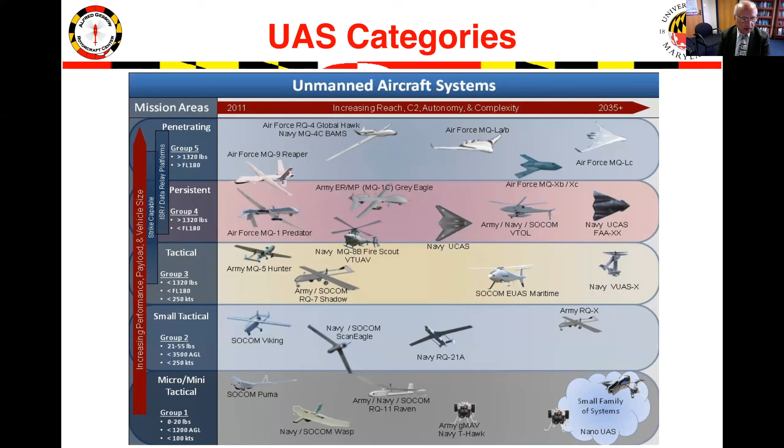Okay. So my talk is going to be small UAS and delivery drones, challenges and opportunities. So I'm from the University of Maryland, and I've been working in this area for the last 20 years or so. So let me first start with the definition of what I'm going to talk about, small UAS. As you know, the Department of Defense has divided these unmanned aircraft systems into 5 groups. I'm going to talk about group 1, which is at the bottom, called micro mini tactical aircraft. The differential is that the gross weight is less than 20 pounds. Some of the vehicles you see on the bottom fall under this category. Okay.

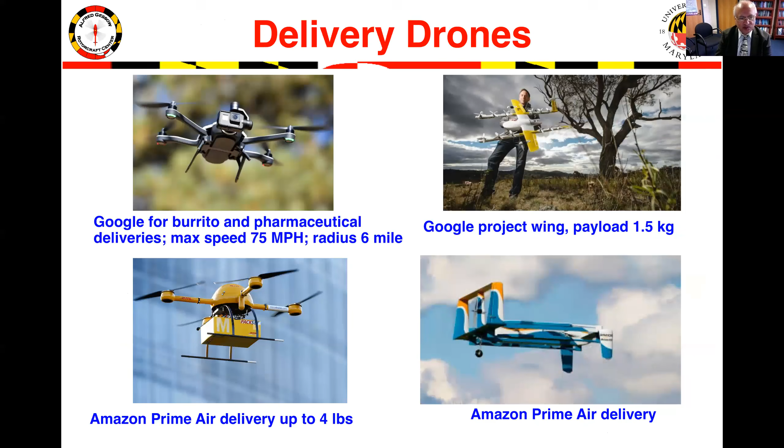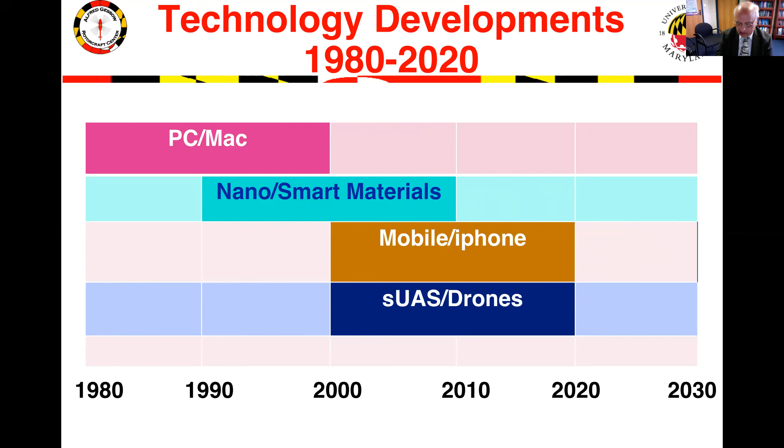Okay. So let me talk about the technology development cycle of 20 years. In 1980, it started with the PC and Macs. Then 1990, nano and smart materials. In 2000 was the beginning of the mobile phone or iPhone. And at the same time was small UAS. And so I think hopefully by 2020, the technology will be in a more mature state. Okay. So what are the key drivers of microelectronics? You see miniaturized sensors, servos, and autopilots available. Microprocessing, both the IT and transmission power growing. And this is very closely tied to mobile technology. Advances in microfabrication and 3D printing, numerous potential defense and civil applications, and low-cost systems.

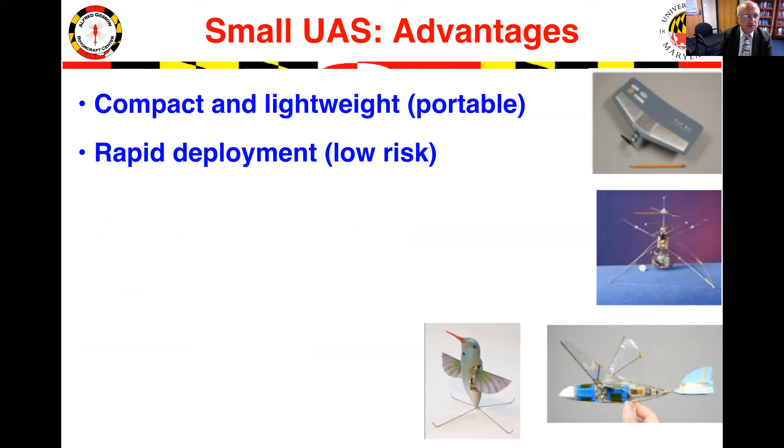Advantages, as you can see, are compact and lightweight, rapid deployment, real-time data acquisition, low radar cross-section, which is especially very important from a military point of view, high maneuverability, and a low-cost system. While you see these advantages, there are also disadvantages one has to keep in mind.

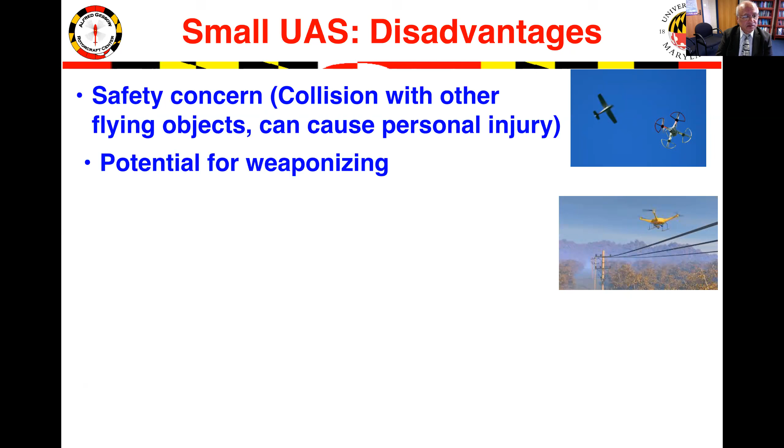Safety concerns, say collision with other flying objects, or they can even cause personal injury to people. Potential for weaponizing, which can be both positive as well as negative. Security threats, privacy issues, susceptibility to damage, especially if you are flying in a gusty or constrained environment, and the need for countermeasures against multiple swarms or collaborative groups.

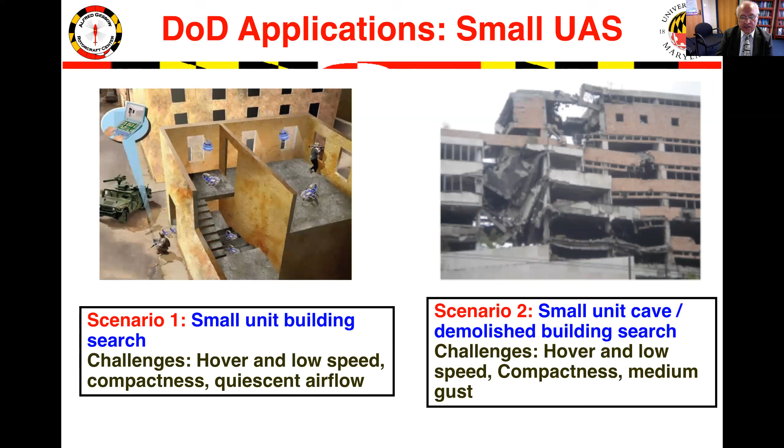Okay. We'll talk now about potential applications of these small unmanned aerial systems. From the DoD point of view, small unit building search, small unit cave or demolished building search. All these things started almost 15 years ago at the start of the Afghanistan war. Autonomous small unit perimeter defense, and over-the-hill, around-the-corner reconnaissance missions. Each one brings its own challenges that one has to take into account.

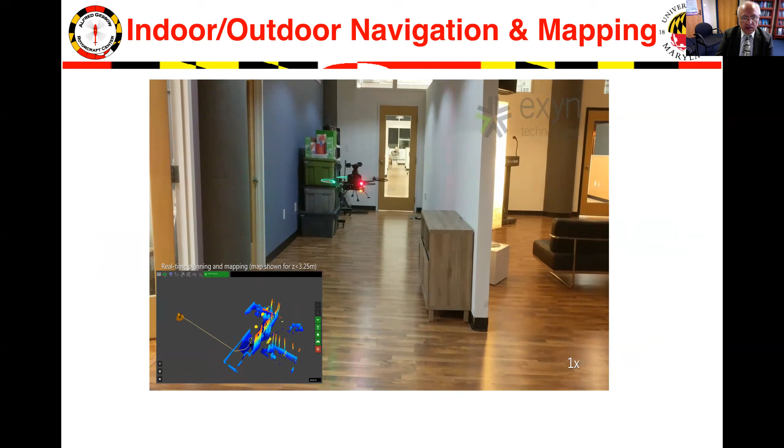Another is operation in 3D, which is dull, dangerous, dirty environments. And you can see indoor and outdoor navigation and mapping. Civil applications are numerous: drug delivery in remote places is already going on in some African and Asian countries. Videography and photography, especially at parties.

Fire rescue operations, a new one getting more and more widely used now. Traffic monitoring. Agriculture applications, which are growing very rapidly: crop spraying, crop estimation, agriculture mapping, crop health monitoring.

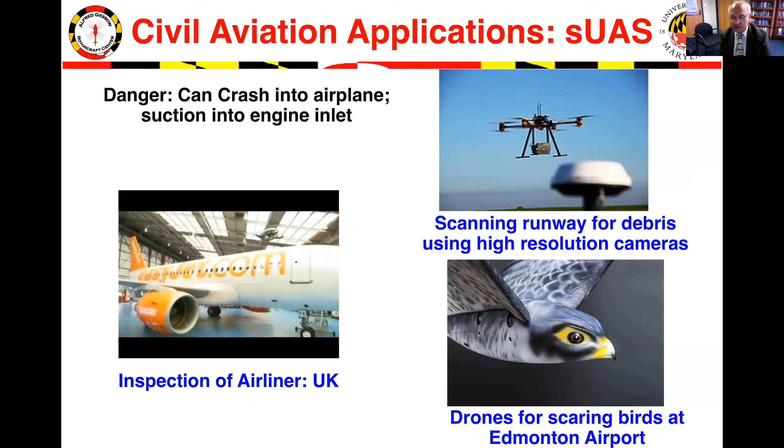In civil aviation, initially, of course, there is the danger they can crash into an airplane, so civil aviation people didn't like them initially, but now they're also using them: inspection of airliners is being done in the UK, scanning a runway for debris using high-resolution cameras, and at the bottom, drones for scaring birds at Edmonton Airport, which is in Canada.

And here is what you see: the big bird is actually a drone and produces all sorts of noise to scare birds. This is called a sonic bird repeller. Other civil applications: infrastructure inspection of bridges, wind turbines, high-voltage cables, gas pipelines, parking lots and roads. A wind turbine, for example, can take almost half a day, especially offshore, which can be done in less than an hour.

Detection of hazardous agents, and also at the bottom, security tagging and targeting, which was also done in Afghanistan. Border law enforcement, counter-drug operations, hostage rescue operations. Another one, asset mapping, is being done. This is hurricane relief surveillance, done by the Red Cross in the Houston area last year. So you heard a wide range of applications.

Let me describe the capability of a small UAS platform: mobility, intelligence, and multiplicity. For example, for mobility, the smaller the better. But for gust sensitivity, smaller is terrible. Frequency of operation is much higher in a small one, so one has to keep that in mind when choosing a sensor.

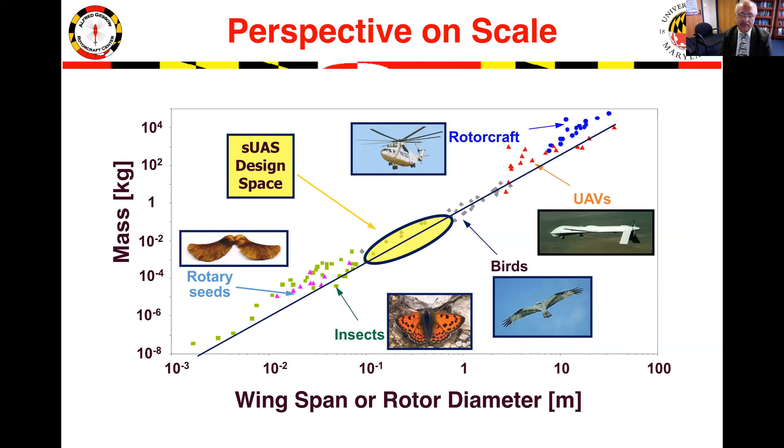Now here is, of course, a perspective of scale. The vertical axis is mass, the horizontal axis is the wingspan or rotor diameter. As you can see, the bluish ones are full-scale rotorcraft, the red ones are UAVs, black are birds, green are insects, and magenta are rotary seeds. So all these things actually fall on a trend line. Small UAS fall somewhere between large insects and small birds.

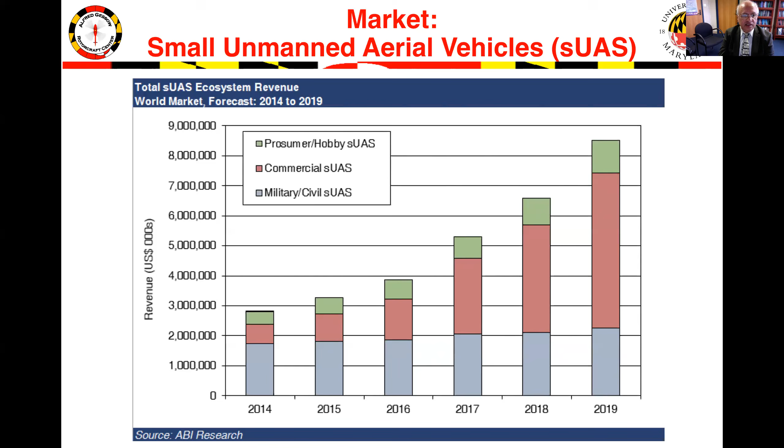Okay. How big is the volume? This year, 13 million of these platforms have been sold, platforms which are less than a kilogram. As you can see, the bottom grayish one is defense, which is more or less saturated, not much change. And the top one is hobbyist, which is again saturated. So the real change is happening in civil, commercial applications, which is the light pink.

In terms of dollar value, it is currently about 15 billion and expected to be 25 billion by 2020. This does not cover delivery drones, which may almost triple this market. Just to give you a feel about delivery drones, a few years ago we had an AHS student design competition. Our students participated. This was to have a delivery drone in the area of the Washington and Baltimore suburbs.

It requires 2-hour delivery, almost 5,000 packages per day, in something like a 50 miles by 50 miles area. At peak time you need about 443 packages, which means 300 vehicles in the air at a time. So you need, of course, a central warehouse, the customers, drones, and communication.

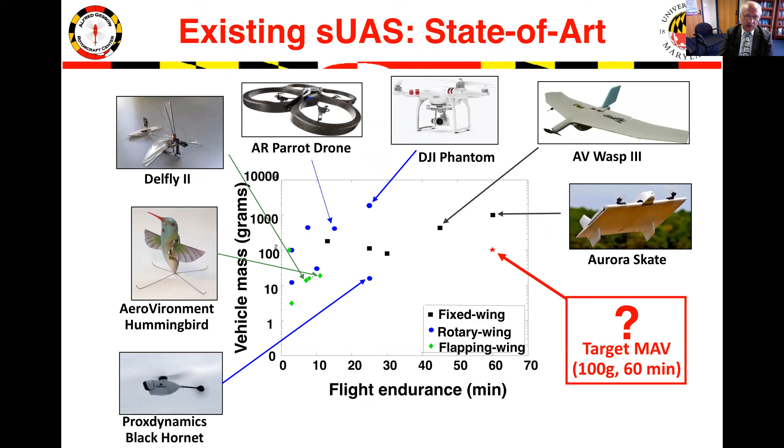And this is how it will go. So you can see almost 300 vehicles can be there at a peak time. So again, I said DARPA came up with the idea of 100 grams, 60 minutes. Where do we stand today? The fixed wing can achieve that goal, but the rotary wing is still struggling at close to about 20 minutes. They do not have the needed endurance or the payload. So I will talk about some of these vehicles later.

So what is the required capability? Of course, you need flight, hover, forward flight, gust tolerance, and autonomy. I think you need feedback control that is fast, computationally simple, and robust. If you think about a quadrotor, you need a rotor, which means it is exposed to very low Reynolds number aerodynamics, plus the propulsion system, motors, speed controllers, sensors, navigation, airframe, and the payload. So let me go through some of these elements one by one before coming to a complete system.

So low Reynolds number aerodynamics. Reynolds number is the ratio of inertial force to viscous force. In a full-scale helicopter, the Reynolds number can be a million or more, whereas at small scale it can be 10,000 to 100,000. This is the range where the flow goes from laminar, through transition, to turbulent. In laminar flow, where most of these vehicles operate, viscous forces dominate, and the flow is more vulnerable to separation under an adverse pressure gradient, which means CL max, CD minimum, and CL over CD are functions of Reynolds number, and they get affected.

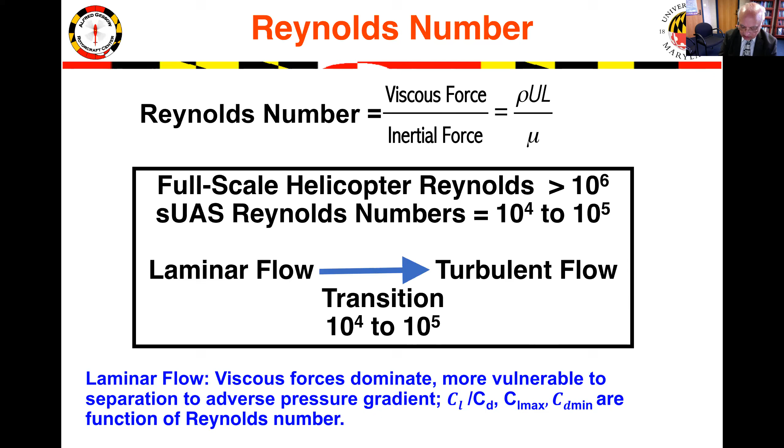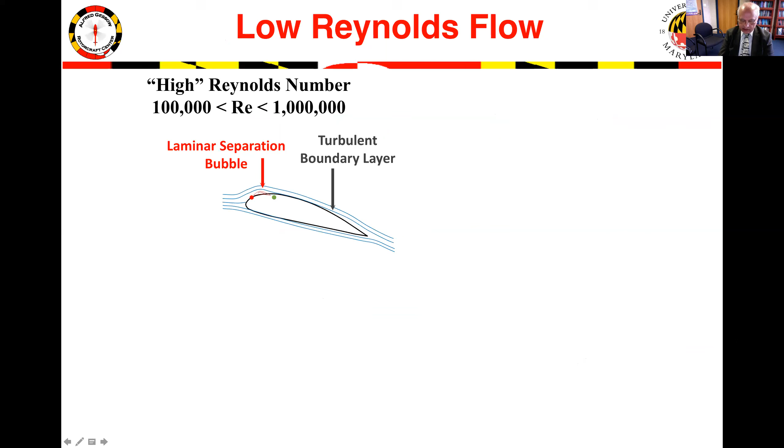First we start with very high Reynolds number. As you can see, there is a laminar separation bubble near the leading edge, which gets reattached. As you lower the Reynolds number, this separation region spreads. But when you go to very low Reynolds number, like 10,000 or around that, there is separation right near the trailing edge, and that separation region spreads with increasing angle of attack. So low Reynolds number flows are prone to complete separation on the top surface.

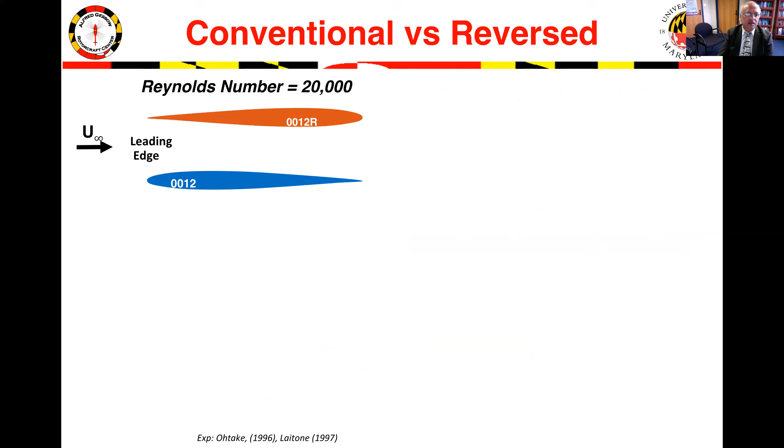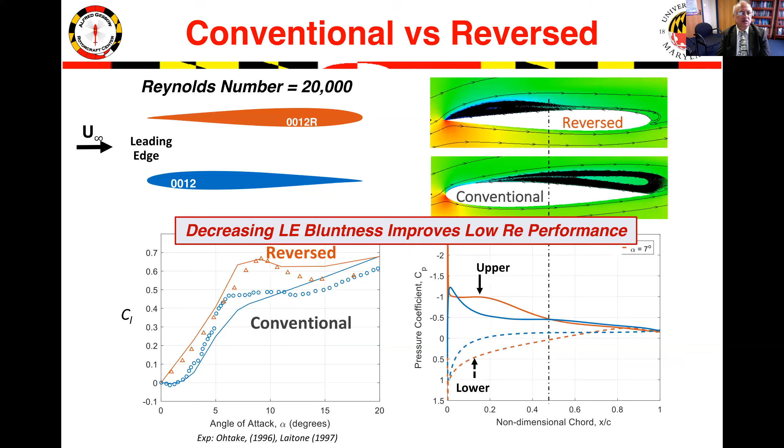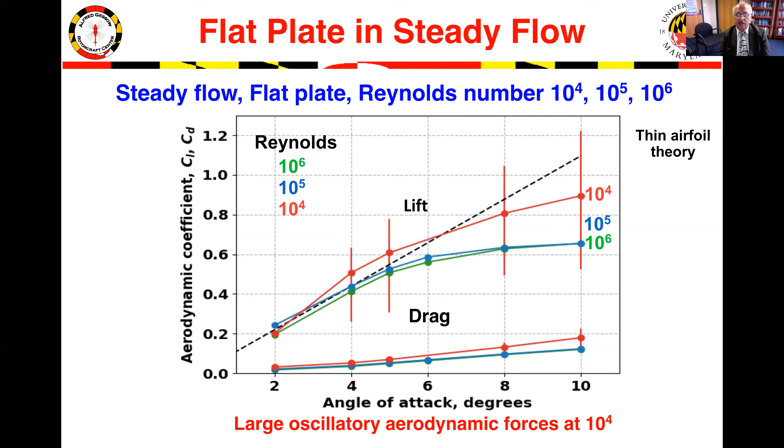Another one: I take steady flow over a flat plate at Reynolds numbers of 10,000, 100,000, and a million. At 10,000, there is a lot of oscillatory flow, which is not the case at a high Reynolds number.

As you can see, the flow at the very first 10,000, 10 raised to power 4, there are a lot of vortices being shed. If you take an oscillatory flow at a low Reynolds number, defined by reduced frequency K: 0.005 is quasi-steady, 0.05 is unsteady, and 0.5 is highly unsteady. And as you can see, as the reduced frequency decreases, there is increased presence of high frequency content.

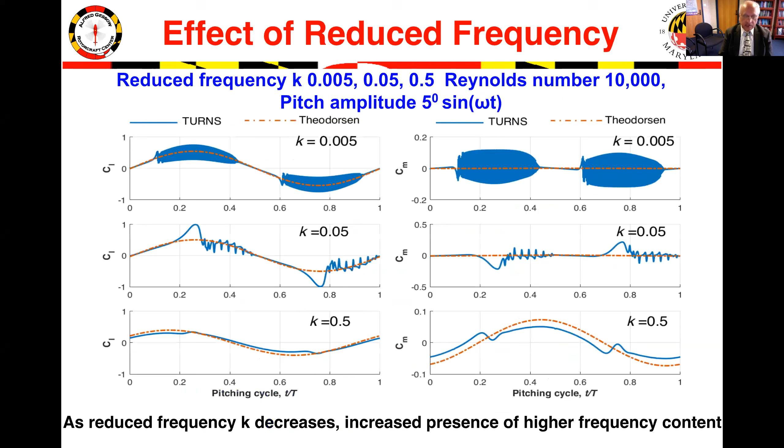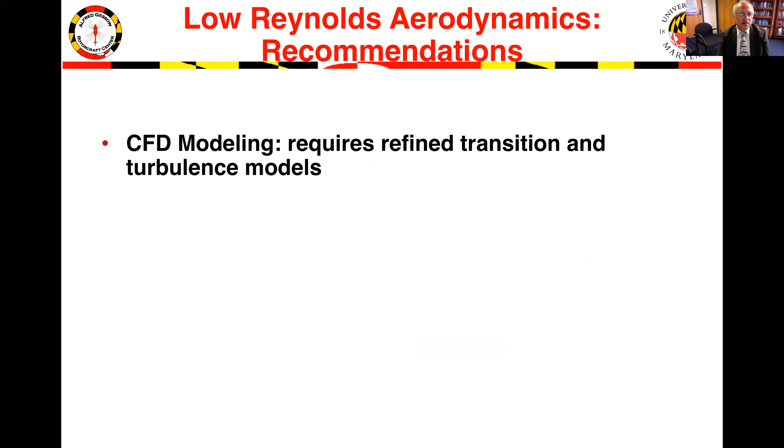So low Reynolds number airfoils are very susceptible to separation. Airfoil characteristics like lift, drag, moment are nonlinear and sensitive to Reynolds number at low Reynolds number. So we need minimum thickness, moderate camber, and sharp leading edge for low Reynolds number airfoils. The future recommendation is CFD modeling requires refined transition and turbulence models. We need detailed experiments, including pressure distribution and PIV measurement for steady and unsteady flow, to validate your CFD analysis.

Coming back now to propulsion, the next topic: electric motor, battery, IC engines. So let's start with the brushed motor. In case of brushed motor, magnets are stationary, the coil is rotating, and the brush of course wears with time. Simple design, brush friction, appropriate for MAVs which are less than 100 grams. Brushless, the magnets are rotating, and because you need a phase voltage to the coils, the speed controller becomes much more important. As a result, it's heavier, and it's probably important for vehicles which are more than 100 grams.

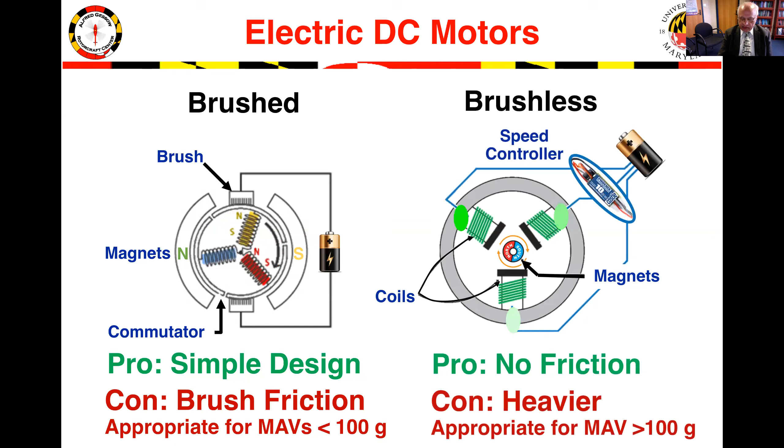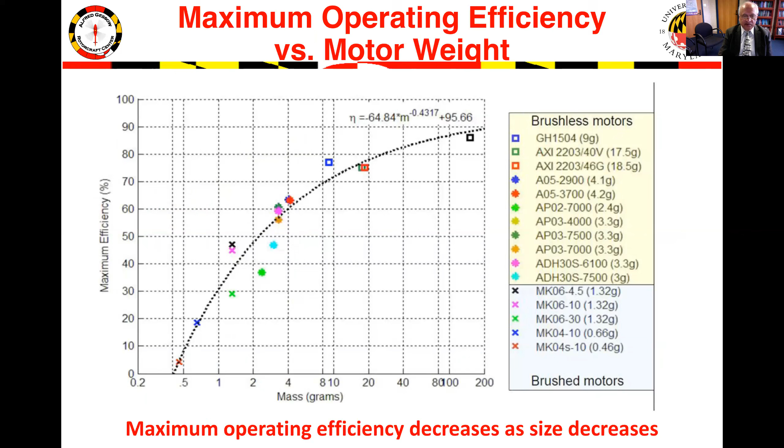Conclusion: brushless and brushed DC motors are the choice for small vehicles. Brushed for less than 100 grams, brushless for more than 100 grams. Efficiency decreases with lower size. A good recommendation for the future is one needs to examine these electromechanical parameters for small size motors. It's not readily available. Develop efficient speed control. That's where one needs to spend a lot more energy and time.

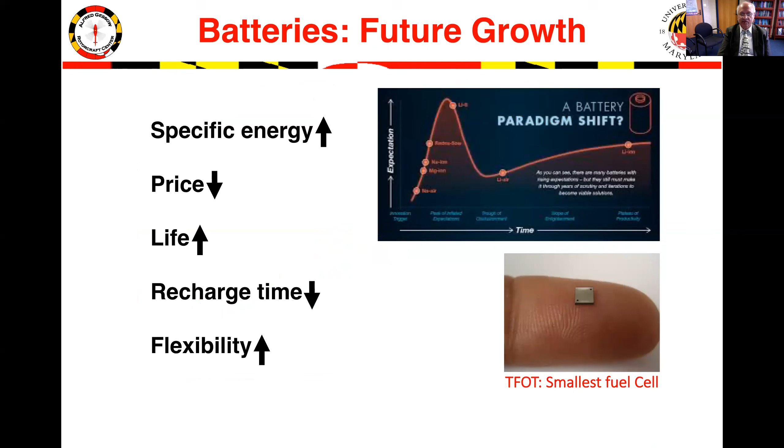Going to batteries, a lot of people think there's not much research in that area. There's a tremendous amount of research going on. No doubt, the lithium-ion battery is probably the most energetic system. Energy density is energy stored per unit volume. Specific energy is the energy stored over weight of the battery. During the last 15 years, there has been an 8% yearly battery capacity increase. That is all because of the cell technology. Specific energy is going up, price going down, life of batteries going up, recharge time going down, and batteries become more flexible.

Internal combustion engines at a small scale. Specific energy of hydrocarbon fuel is about 100 times that of electrochemical materials. It can be mass produced and very cheap. However, the efficiency at small weight or small displacement is going down tremendously. It can be a single-digit efficiency because of increased losses with heat transfer, fluid friction, and leakage at the small size. Performance efficiency falls rapidly with miniaturization. It's not possible to maintain adequate thermal isolation between a hot and cold side.

There is an enormous potential to develop miniaturized IC engines. One has to use material with high thermal isolation, increase combustion efficiency, and also one has to be very careful in terms of acoustics, because these can be very, very noisy also.

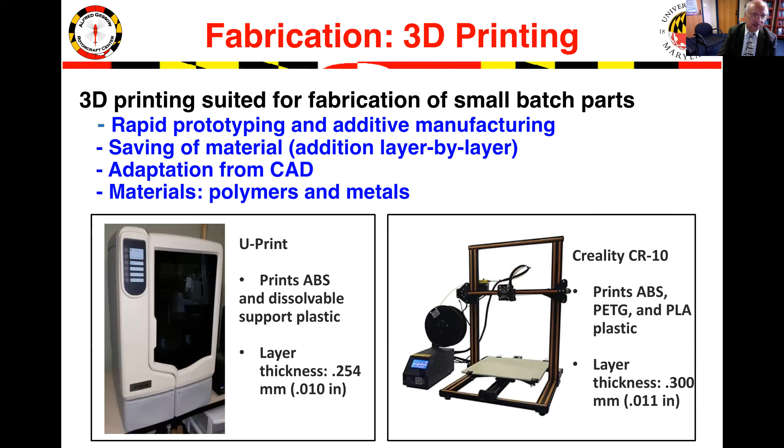Microfabrication and 3D printing: there has been tremendous progress in this area. 3D printing is suited for small batch parts, rapid prototyping, and additive manufacturing. Saving of material because it's done layer-wise. Adaptation from CAD. And material can be both polymers and metals. Numerous parts are built using 3D printing today. The major concern is consistency of material properties over batches and time. And again, a lot of research is going on in this direction now.

Microelectronics: I'm going to talk about the lidars, radars, GPS, and so on and so forth. If you look into an autonomous UAV system, you need flight control hardware, you need navigational sensors, you need communications, and also, because you are working in an obstacle-rich environment, situational awareness, and most important, of course, is a processor, which is the computer. What are the attributes needed? Compact, lightweight, low power requirement, low processing requirement, and they need to be robust and cheap.

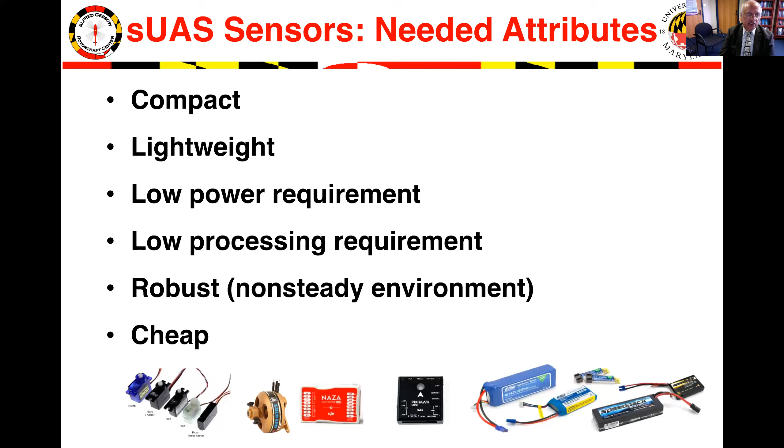Coming back to the difference between lidar and radar. Lidar uses pulsed laser light to measure and detect distance of an object. High resolution, it can detect small objects and sense nearby objects. Radar uses radio waves to measure velocity of an object. Lower resolution, suitable for larger objects, it can sense velocity, direction, and distance of faraway objects.

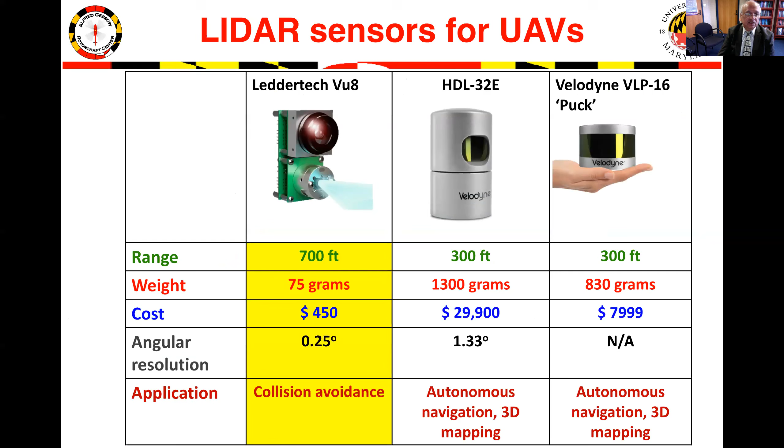And here is an example of lidars. A lot of research is going on because of autonomous cars. Here on the left side with the yellow, the lidar is basically 75 grams, and it can be used for collision avoidance. An ultrasonic sensor measures distance using the bouncing back of a sound wave of specific frequency from an object. It can be very light, something like 4 grams, and very inexpensive. It's not affected by color, dust, dirt, can be used even in the dark, low cost. Accuracy depends on temperature and reflective material, but it's always a small distance.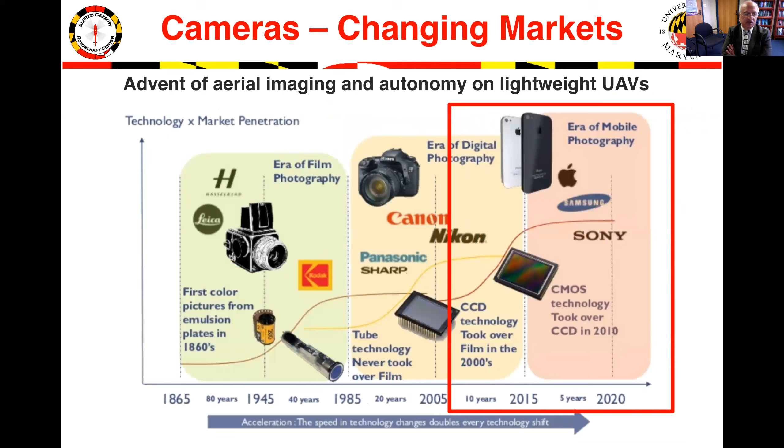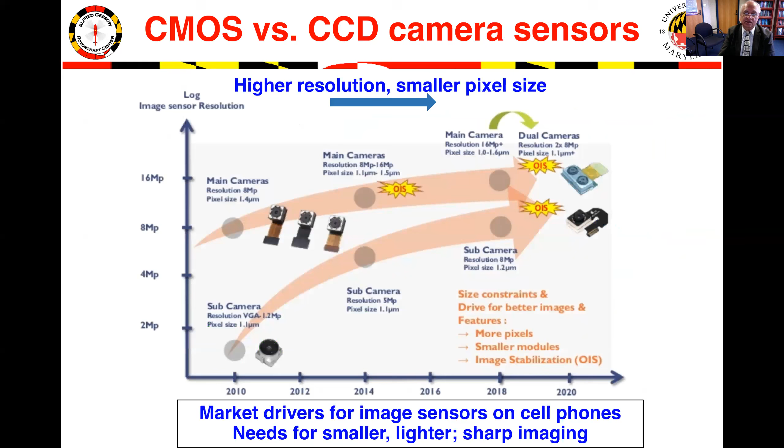Cameras: after the invention of the digital camera, there has been tremendous progress in cameras, and now with the cell phone, even more progress. Two types of cameras, CCD and CMOS. CCD gives low noise images, is more accurate, but also expensive. Compared with CCD, CMOS is widely available, cheap, compact. And again, the market driver for image sensors is the cell phone. It needs smaller, lighter, and sharp imaging, and there's a lot of progress going on in CMOS.

An optic flow sensor is basically, again, using these cameras, you can get an optic flow pattern of apparent motion of objects. It's a relative motion between object and the scene. Computer vision: a computer can achieve understanding from digital images or videos. It involves acquiring, processing, and understanding digital images. It needs a lot of processing power. Only very recently, the iPhone X has used computer vision to identify the owner. Imagine in the future you don't need any lock, and computer vision can find out who the owner is.

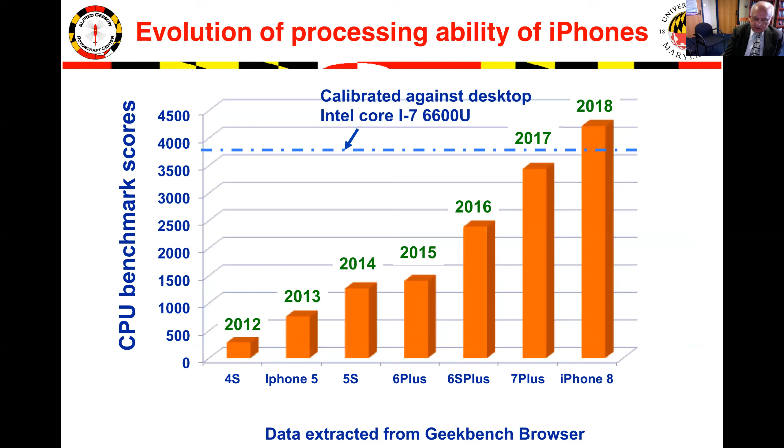So let me talk now about the microprocessor, which is basically a computer. To give you an example of the iPhone itself: see the iPhone 4S and iPhone 8, which was last year. The top dotted line is a calibration Intel core for a desktop computer, which is the baseline. So the iPhone 8 has a processor which is more powerful than this basically tabletop computer.

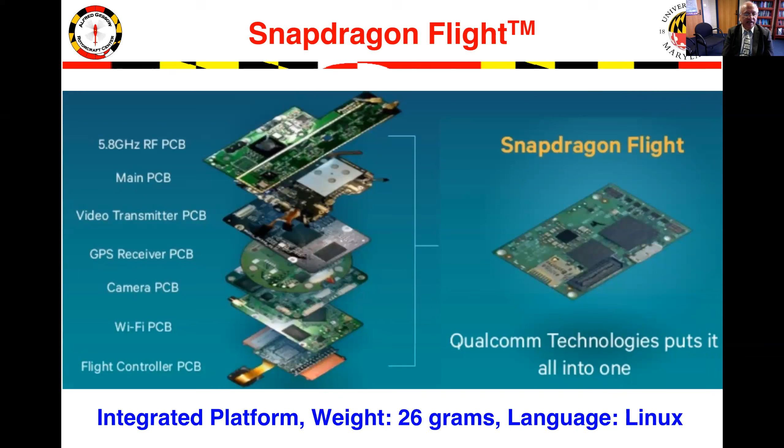Snapdragon Flight is another one that has come out very recently from Qualcomm. It is about 26 grams, a very powerful computer. In addition, it also has two cameras with it. It uses Linux, and it's an integrated platform, the whole thing is on a chip.

Coming back to navigation and location, GPS and cell towers. Let me say a few words about GPS. GPS is operated by the US Air Force. It used to be 24 satellites and now 32 satellites are in operation all the time. When your GPS connects with at least 4 satellites, it tries to give you the location and the time.

Of course, with the cell tower, you have antennas and electronic communication equipment placed. So line of sight. So instead of operating with the satellite, you can get your internet using these cell towers. Most cell phones are connected with the cell tower. In flat land, it can go almost 30 to 45 miles, whereas in hilly areas you need more cell towers.

Just to talk about GPS, how big it is today. The GPS on your cell phone is less than about 5 grams. It is expected to have a spatial resolution of less than a foot now.

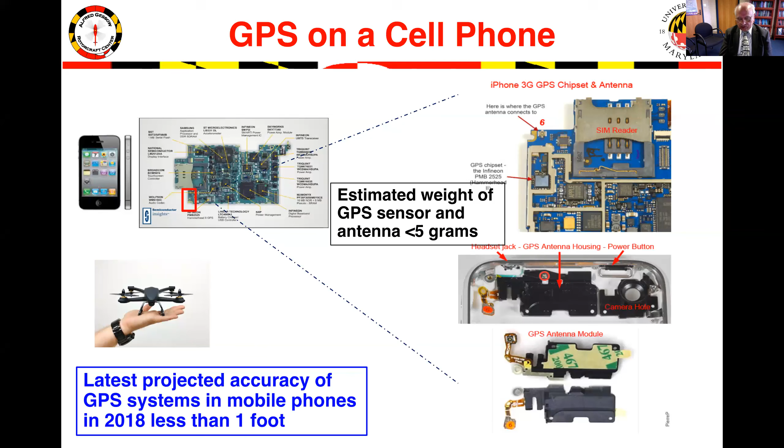Autonomy: what you have is when you go into high level, bigger size, there is a lot more autonomy. At the smaller size, the autonomy is slowly growing as the computers and processors are becoming faster and miniaturized, and also the sensors are becoming lightweight. So I think with the small vehicles, the autonomy level will grow.

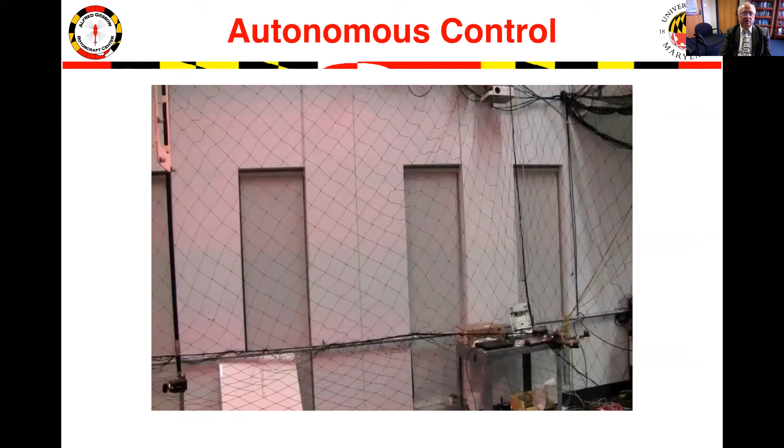Okay, coming back to integrated vehicles. If it's a non-hovering vehicle, then the fixed wing is the way to go. A hovering vehicle can be single main rotor, coaxial rotor, shrouded rotor, quadrotor, or it can be an unconventional rotor-based design. Long-range endurance compound can be tilt rotor, tilt wing, or tail sitter.

Hovering or non-hovering also can be flapping wing. If it's insect based, then it can hover. If it's avian based, it means long distance. It also can be reaction based, which are very power intensive. We don't talk about those.

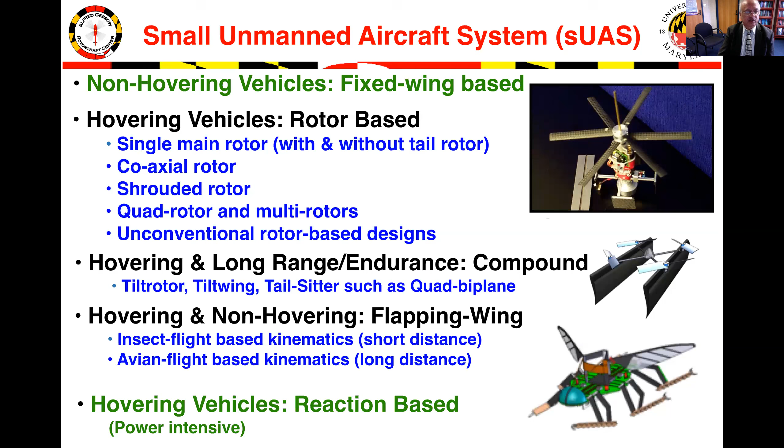Rotor based, there are two most important factors: figure of merit, which means ideal power required to hover over actual power required to hover, and power loading, thrust produced per unit power. Here is the power loading on the vertical axis, and it's very much a function of disk loading, which is a load per unit area of the rotor disk.

As you can see, the birds, the insects, they are much more efficient, and so are some other vehicles, because you need to have a very low disk loading. Where do we stand? Figure of merit: for full scale, you have 0.7 to 0.85, whereas MAV scale is low because of a lot of profile drag. Power loading is the other way. That's because the disk loading is very, very small at small vehicles.

So when I look into the hover power, as you see in green, it consists of two components: profile power and induced power. In the case of full scale, the profile power over induced power is 10 to 15%, which is not the case with the MAV.

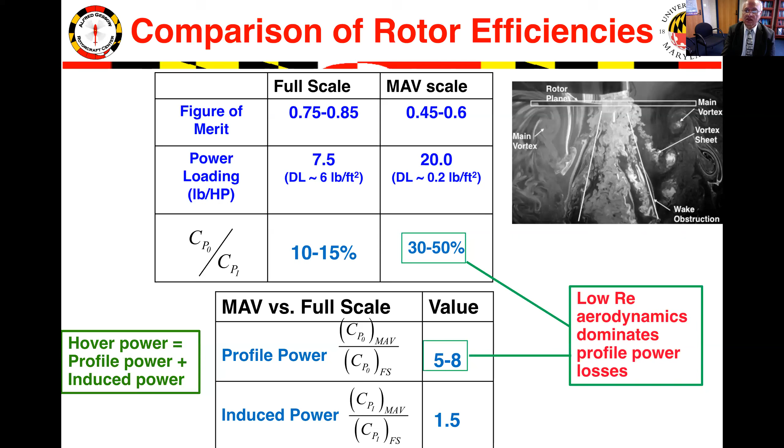And the reason is profile power is 5 to 8 times because of the aerofoils, a lot of drag. Induced power also is very large at a small scale. And as you see on the figure, right-hand side on the top, there is a lot of separation, all sorts of vortices at a small scale.

Single main rotor. Of course, if I take a single rotor, there are a whole range of vehicles available. 18 gram is the Prox Dynamics, and I'll talk a little bit about that one. It's about 18 gram gross weight, rotor diameter of 12 centimeters. It can go almost 25 minutes.

It also has GPS and a camera and a digital link, and it comes as a kit as a 2-copter in 1.3 kilograms. You cannot buy it; it's only defense related, and also very expensive, $350,000 for this kit.

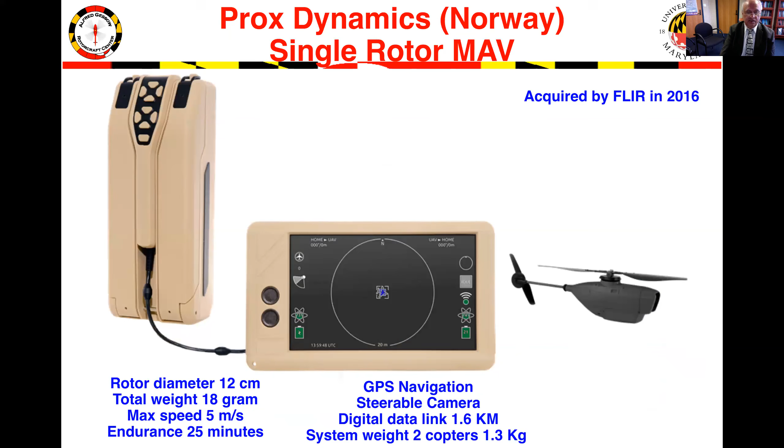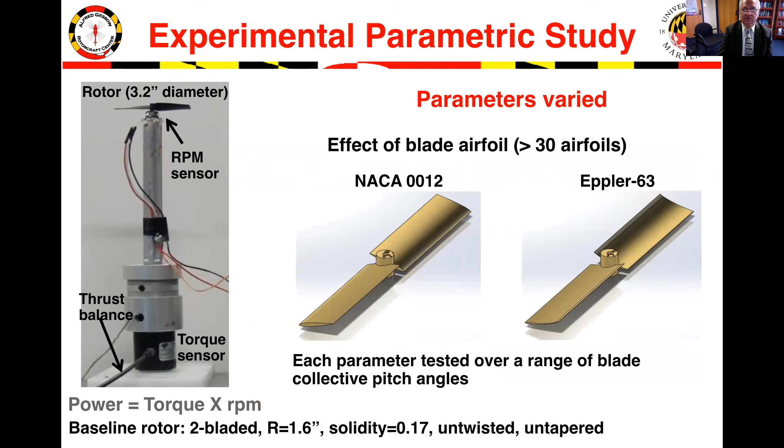So we did a whole lot, for example, if you take a rotor with a rotor diameter of 3 inches. We tried many different aerofoil shapes, chord, variation of chord, variation in number of blades, effect of twist, effect of planform, and also effect of winglets at the tip. Something like 500 rotor designs tested, and we came to the conclusion.

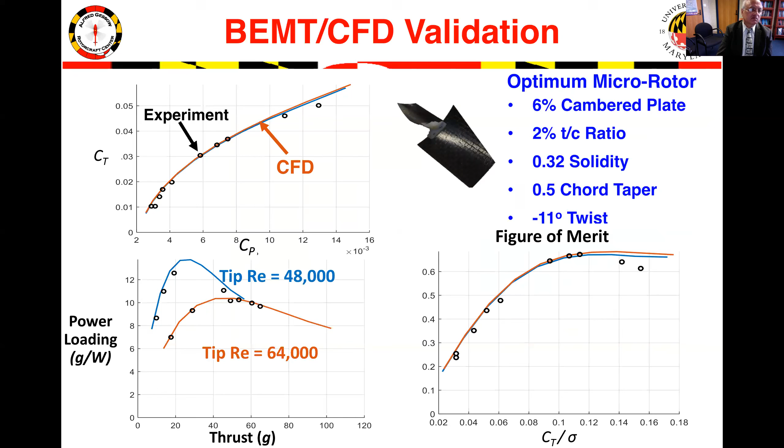We have a two-bladed, 6% cambered thin plate of 2% thickness, and modest twist. As you can see here, the figure of merit is close to 0.67, and you can also validate it with the CFD analysis. So this is the highest figure of merit ever reported at a small scale.

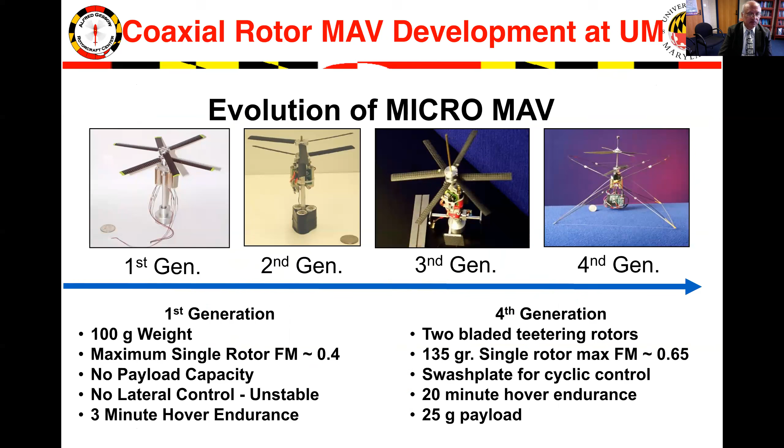Coaxial rotor, there are quite a few in a range of weights. And at least if one puts a lot of attention to the design, you can certainly improve, as is shown in this graph. Instead of having a hover endurance of 3 minutes for the same power, you can get almost 20 minutes.

So coaxial rotor is a compact design. And of course, the cons are mechanical complexity of design, poor yaw stability, aerodynamic efficiency is low, and it needs significant rotor separation at high speed, which means more drag.

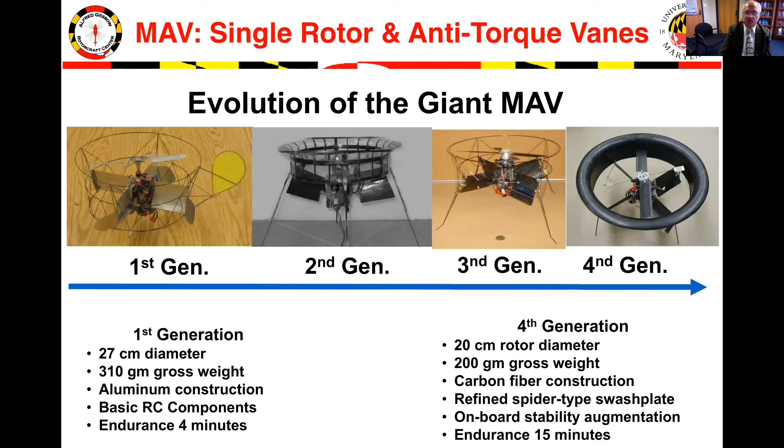A single main rotor with anti-torque vanes, which means no tail rotor. These vanes at the bottom are exposed to the flow of the main rotor. Again, one has to go through very carefully, and then we find one basically needs some sort of a shroud to keep the wake. Compact and simple design.

These are the advantages, that you don't need a tail rotor. Flight stability issue near ground, limited control authority, needed additional power because of hub and vanes, almost the same level as a tail rotor.

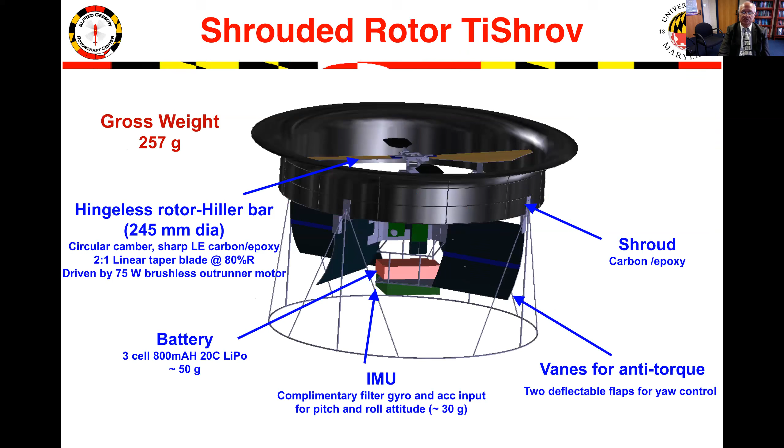Shrouded rotor, being used very widely in tail rotors of full scale. We try to see at a small scale whether we can also use a shroud. A shroud has to be very lightweight. The key factor, of course, keep in mind that the rotor tip has to be very close to the shroud so that you can weaken the tip vortex. The lip radius has to be modest, say 13% of the rotor. Diffuser angle modest, something like 10 degrees.

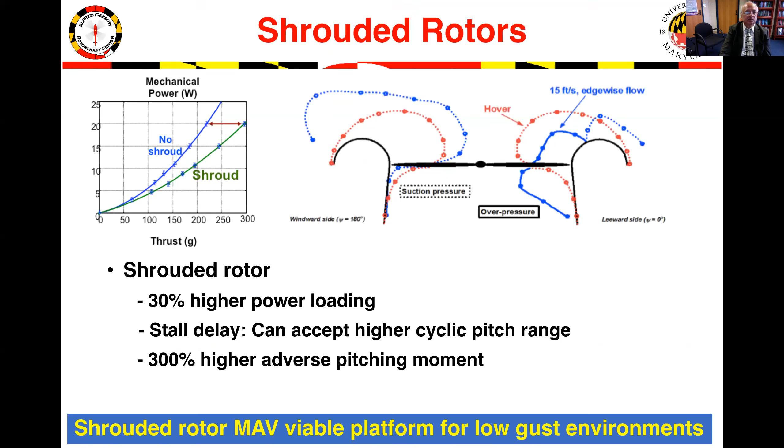And the length of the shroud is also very important, let's say 3/4 of the radius. You can almost double the thrust for the same power. The challenges are, of course, the structural weight of the shroud, and also the performance degradation in forward flight. Not only do you get a lot of drag, but you also get a very large pitching moment with the sideways flow. Very sensitive to gust.

Pros, of course, the shroud protects the rotor, which is very important. Improved hover efficiency, delayed stall. Of course, it's challenging to design the shroud, it has to be lightweight but stiff. And degrading forward flight performance, high pitching moment in forward flight and more susceptible to gust. So it's another example. One can certainly see these.

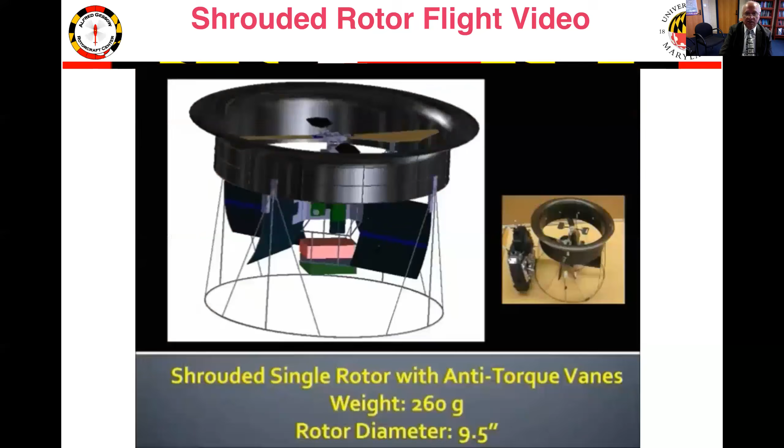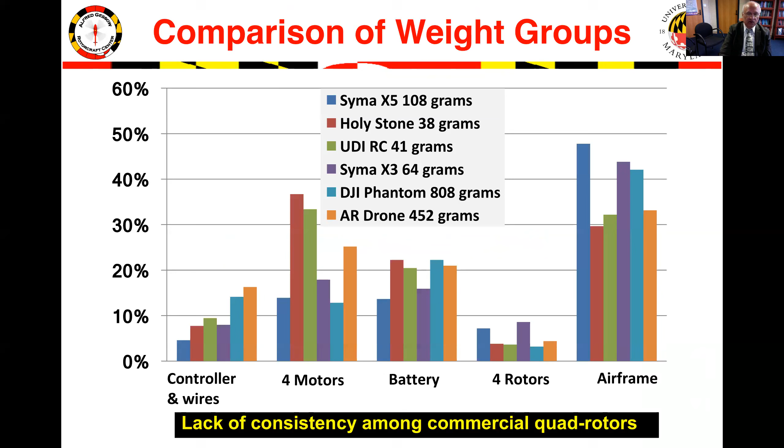Quadrotor, most popular right now, and there are a whole range of quadrotors available. And of course, these are some of the key factors: rotors, batteries, motors, airframe. And if you look at it, there is no consistency in weight of available quadrotors, because many of these have been iteratively built, and there are no available designs to build these things.

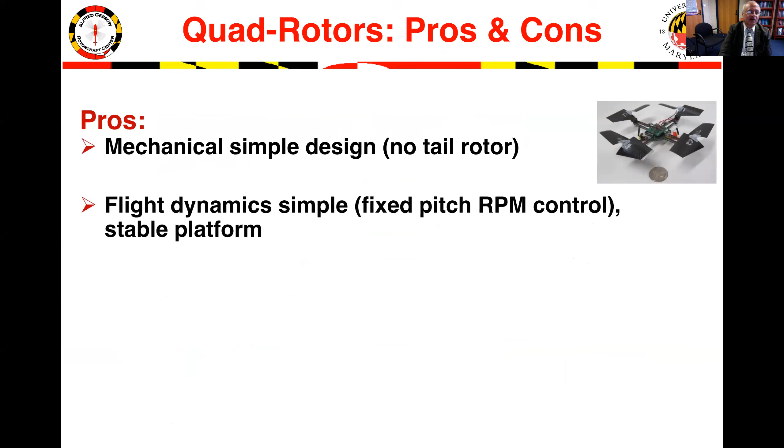So the pros are a mechanically simple quadrotor as a whole. You don't need a tail rotor. Flight dynamics are simple because you can use RPM control. Larger CG travel possible. Cons are, of course, multi-rotor, which means more susceptibility to failure because there are more rotating components. Airframe drag in forward flight can be an issue.

So overall rotor-based challenges are: improve hover figure of merit from 0.5, the current one, to 0.75. Increase range, endurance, payload based on specific flight mission. Improve susceptibility to gust, this is a very big issue for small rotors. Optimize propulsion.

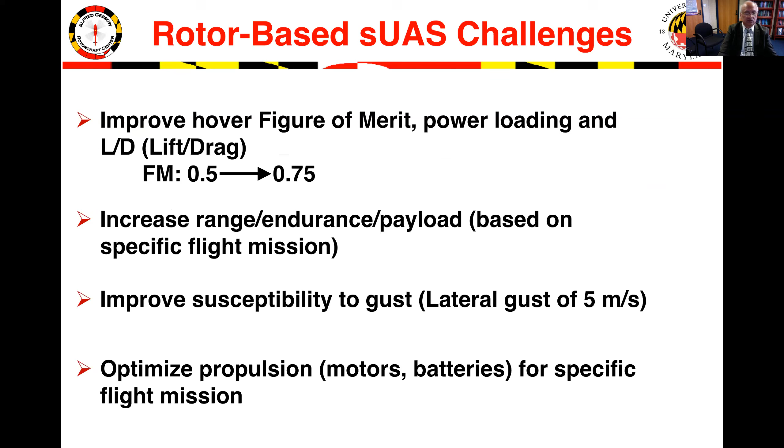So looking into unconventional rotor blade configurations, I give you one example, the cyclocopter. As you can see, the rotor is in the axial direction. Blade pitch changes periodically as it rotates. At the top and the bottom both have to be in the positive direction. The environment is more or less identical in the spanwise direction.

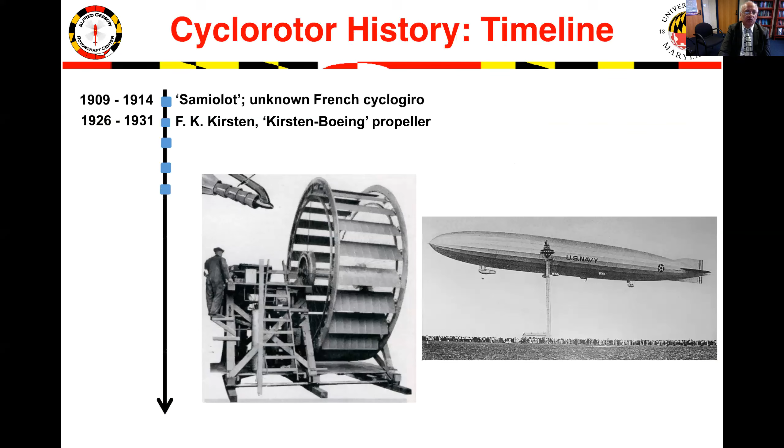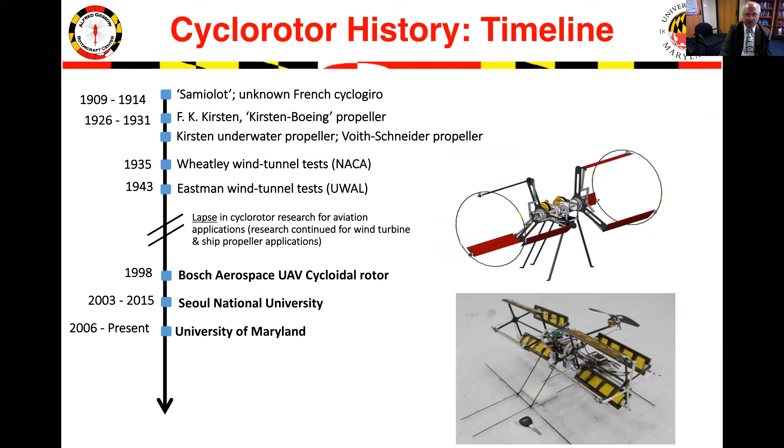The idea of this cyclocopter is more than 100 years old. Many people tried, including Boeing, but they did not have good success because they tried to build a big one and the design tools were not available, understanding was very limited. And almost 75 years later, people again started looking at it carefully. And we at Maryland went through it very systematically to see the idea.

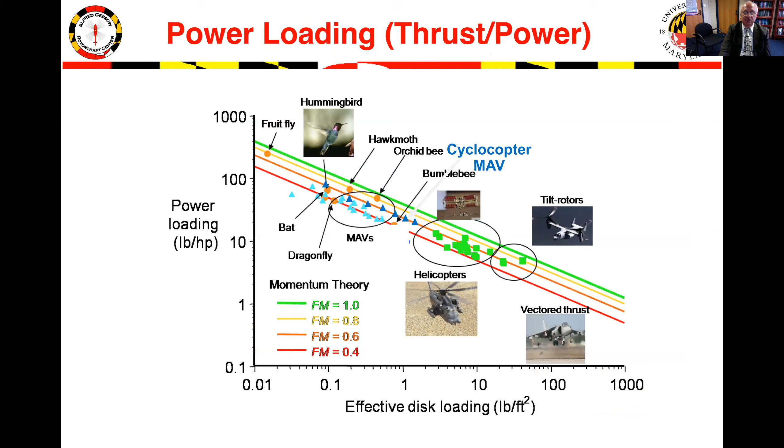And the blue ones, the triangles, are basically the efficiency. It's much more efficient than conventional rotors. As you can see here, you can have a thrust vector because the angles at the top and the bottom are positive. You can tilt the thrust vector in any direction, so you can have almost 360 degrees of tilt. Which means very maneuverable, which means gust tolerant. So seamless from hover to high speed forward flight.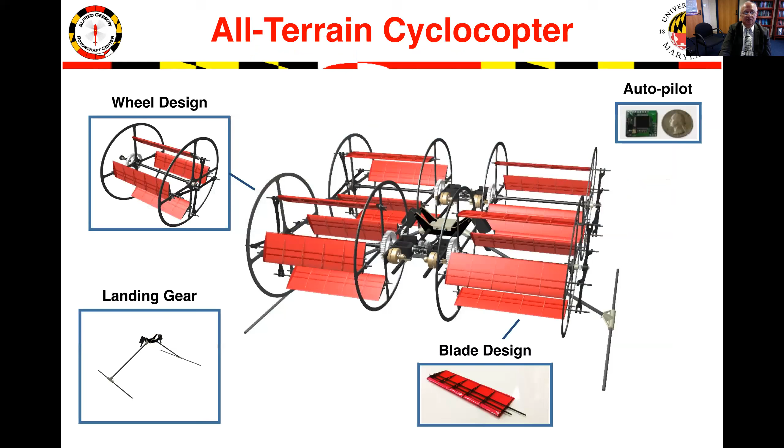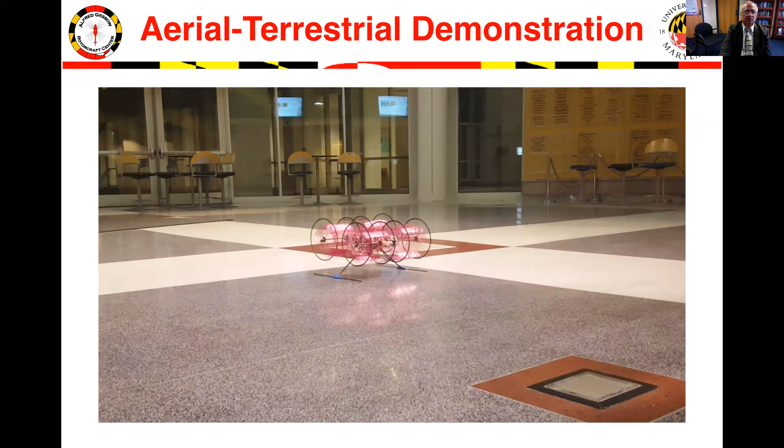And again, this is a small cyclocopter. All-terrain cyclocopter, right? You can see there. It's a quad cyclocopter, which can not only move on the ground, but also can hover. And also can move on the water.

Aerodynamically efficient at small scale. You can have thrust vector capability. Highly maneuverable, which means very gust tolerant. Cons: mechanical complexity, pitch change, airframe drag, and forward flight.

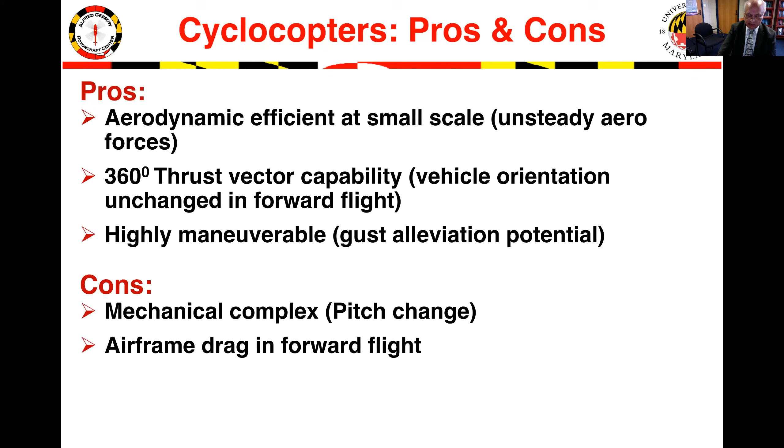So, coming back to if you want to get into a very specific mission, achieve a high-speed flight mission with vertical takeoff and landing. Rotorcraft is good in hover efficiency. Fixed wing is good for cruise efficiency. So have basically some sort of a compound, tail sitter, tilt rotor, tilt wing. Of course, the major challenge is the transition flight, helicopter to fixed wing and fixed wing to hover.

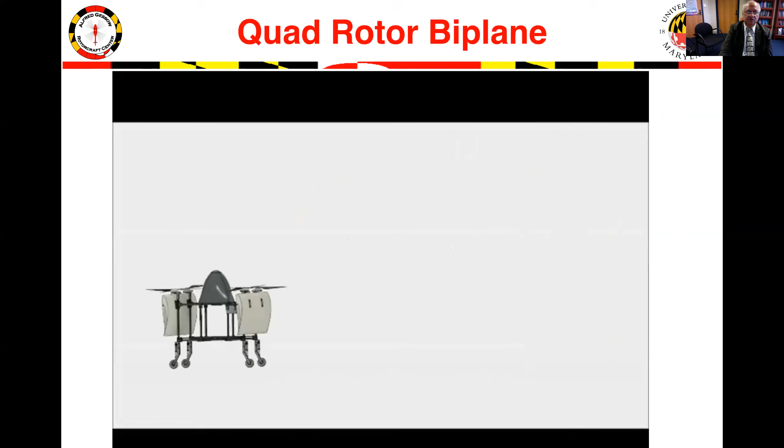So here is the 230 grams quad rotor biplane. The quad rotor is very popular. Using a wing, you can get a biplane. And what's happening is you require almost 1/3 of hover power for forward speed. So here is a good example of our forward flight. And here will be the actual example, which can be very efficiently used for that.

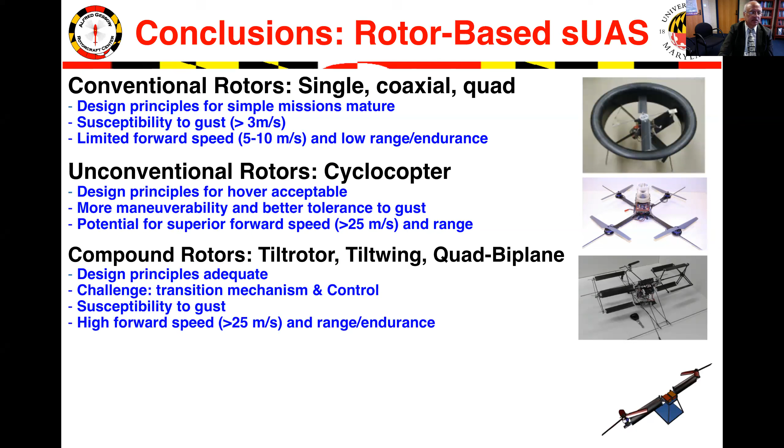Unconventional rotor, cyclocopter: design principle for hover very acceptable, more maneuverability or better tolerance to gust, potential for superior forward flight. Compound rotor: design principle adequate, challenges in transition mechanism from hover to forward flight, again susceptible to gust, but high speed possibility, so one can get more range and endurance. Future research is to design the vehicle for a specific mission. Based on the mission, you can come up with the right type of vehicle.

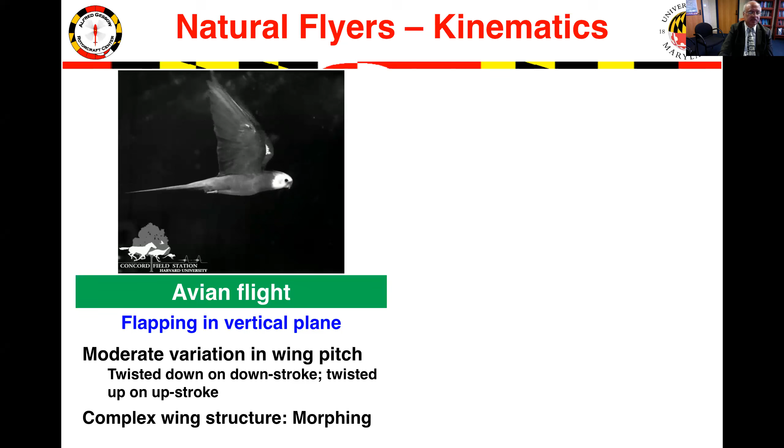Flapping wing based, of course, you have both insect and avian. As far as the avian is concerned, they're flapping in a vertical plane, moderate variation of wing pitch, twisted down on downstroke, twisted up on upstroke, but morphing of the wing also takes place. Whereas in insects, flapping is in a horizontal plane, large variation in wing pitch, hover capable. The avian are not hover capable.

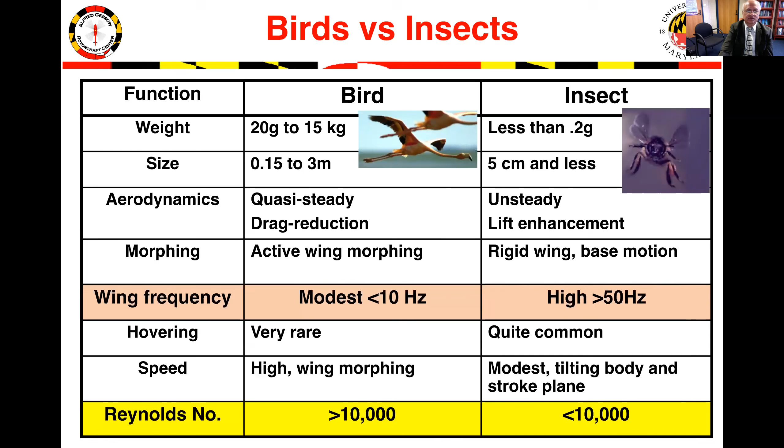Also see the Reynolds number in the insect is very low. Avian is high. The frequency range is also very different, much higher in insects than avian. So good gust tolerance with the insect based, it can hover. But the design is quite complex.

What are the vehicles available? Many attempts have been made, okay? But most of the vehicles have very, very low endurance. The limited success, the most successful is the Hummingbird by AeroVironment. It has endurance of 4 minutes. The other one, I will say, is by Texas A&M with endurance of 1 minute.

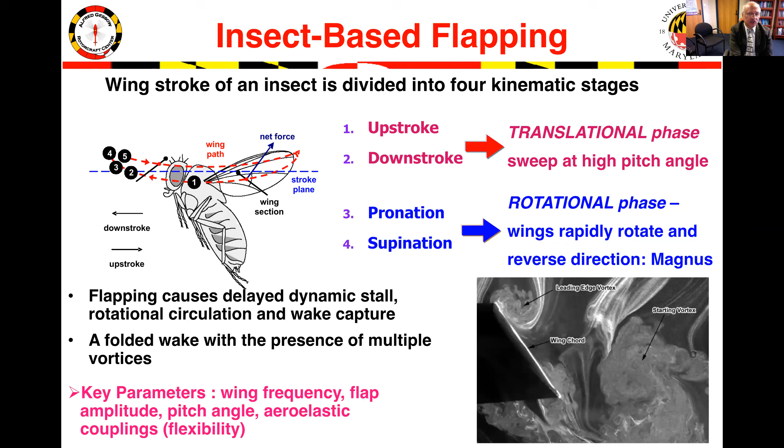Flapping wing is in a similar stage, very limited design. Okay, just looking into the different wing motions, you have upstroke, downstroke at very high pitch angle, pronation and supination when the wing tilts from one direction to the other. The key parameters are wing frequency, flap amplitude, pitch angle, and also the flexibility of the wing, which is what we call aeroelastic coupling.

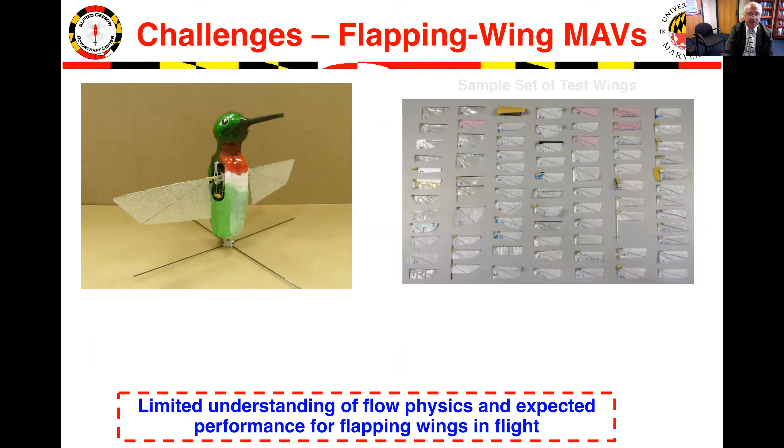So I said it has to be unsteady wing motion and lightweight wing structure. The wing weight is very important. So AeroVironment went through hundreds of iterations on the wing design to find the right wing. So the problem is a limited understanding of flow physics and expected performance of the flapping wing in flight.

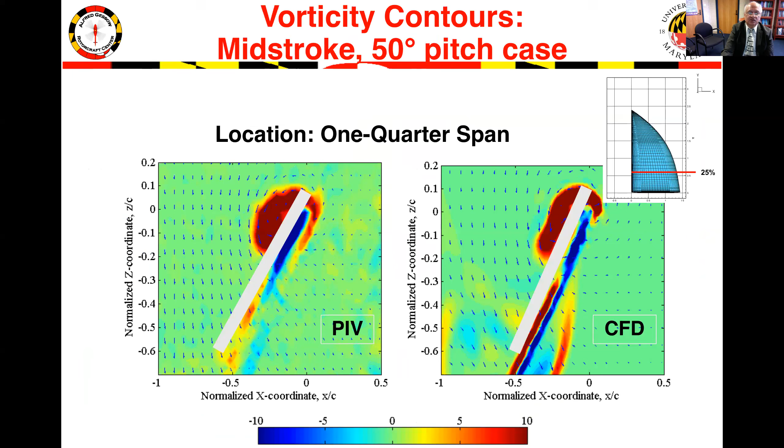So here is a large-scale wing being tested in a wind tunnel. If we take the PIV measurement at one quarter span, you can very easily predict with CFD, as long as you have a proper CFD validated with experimental data, and you can find out the lift time variation as well as the steady lift, plus also the power. You can get a good estimate using the CFD tool.

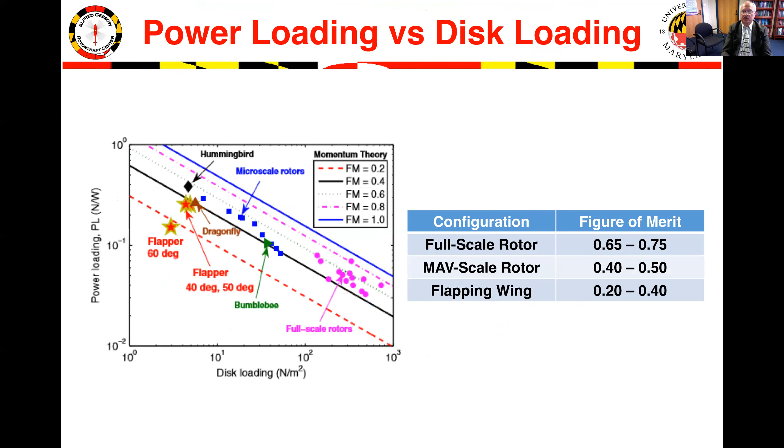But the overall performance, just see the figure of merit of the flapping wing of today, is very, very low. So ultralight wing design with high frequency and control implementation. A good example of this is being done by Texas A&M. So for a flapping system, I will say wing kinematics are complex, the basic principles of flight are becoming more clear, design principles are very rudimentary, and controllable integrated vehicles are not ready.